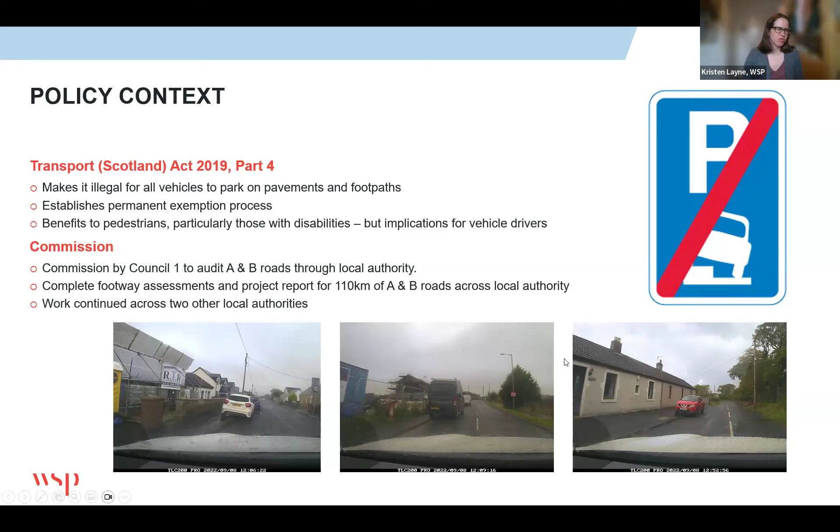So we narrowed it down to 110 kilometers of A and B roads across the local authority. I'll show you what that looked like in practice, and then how we applied that into other local authorities. The pilot project for this first local authority took place in 2022, and that was the first piece of work we did in this space.

The legislation had been passed 3 years prior, but everyone had other things on their mind in 2020 and 2021, as you can appreciate. By 2022, we realized, oh goodness, they're going to start enforcing this legislation. How do we actually do this, and how do we address the implications of this?

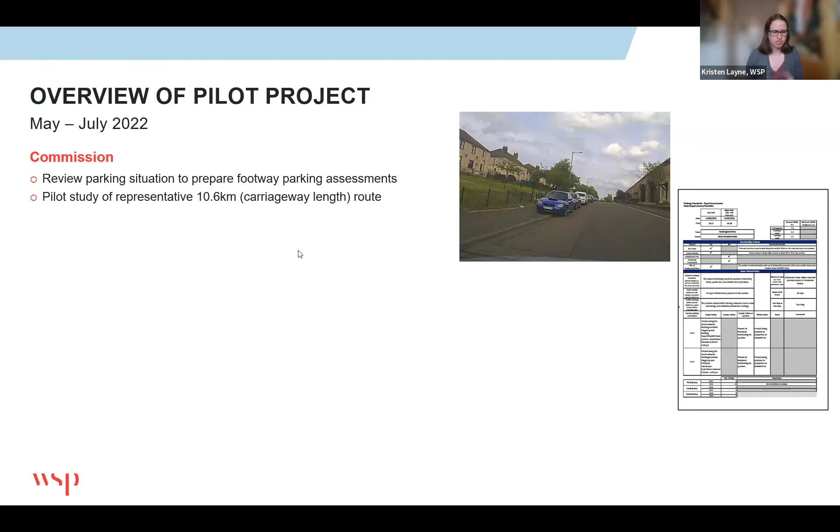So we started with a pilot study, a representative 10.6 kilometers of route - that's the carriageway length. Of course, the second you get footways involved, there's more, because all of the roads we were looking at had at least footway on one side, if not 2 sides. And we went from there.

First we did a desk-based study and identified road characteristics and functionality, and boy, was Google Street View a lifesaver here. It's not perfect, it's got its problems, but it made it really useful to have a look and familiarize ourselves before we actually went out.

This wasn't a particularly active travel-based methodology due to time constraints, although we did use electric vehicles so that we weren't putting additional pollutants into the air, if that's worth something. We did a daytime and evening site visit, driving each route twice, so we were able to record both sides of the road and capture in real life what was happening on a typical weeknight and weekday.

We did it once at night and once during the day, because some people are away during the day but then park their cars in the evening, so we wanted to see what was happening there.

We took that dash cam footage we collected, compared it with the OS mapping, and recorded 2 major things: the parking behavior - how many wheels were on the footway, if any - and the available carriageway and footway width. You'll see why that's relevant momentarily. Then we analyzed what we saw and recommended routes forward.

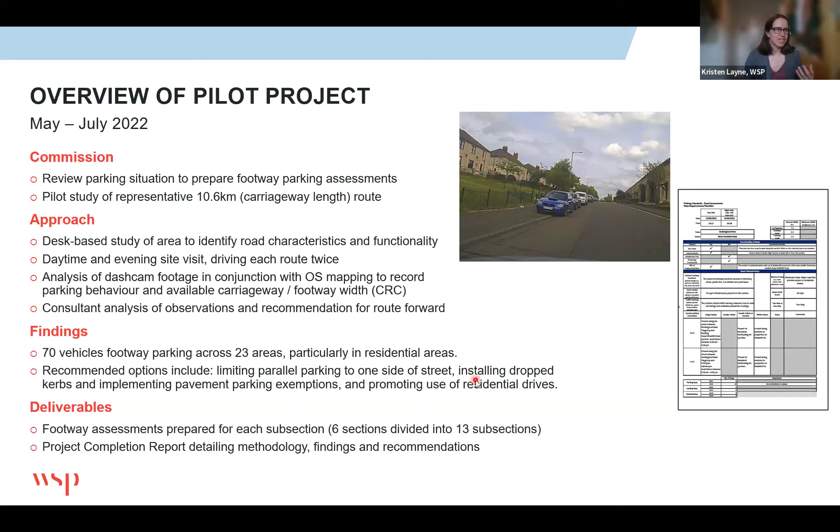So that was our first initial pilot project. I'm conscious that took quite a while to talk through, but it gives you an overview of what our approach looked like. We then took that and rolled it out to the full 110 kilometers across the local authority area.

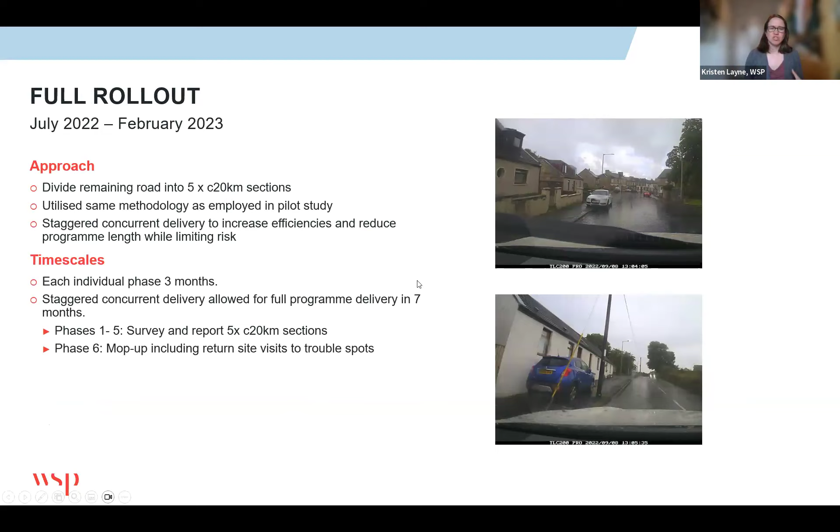So for those of you keeping track at home, roughly speaking there were about 100 kilometers left. We divided that into 5 sections, utilized the same methodology of recording the route, and made sure we did that again on representative days, doing it in the early autumn.

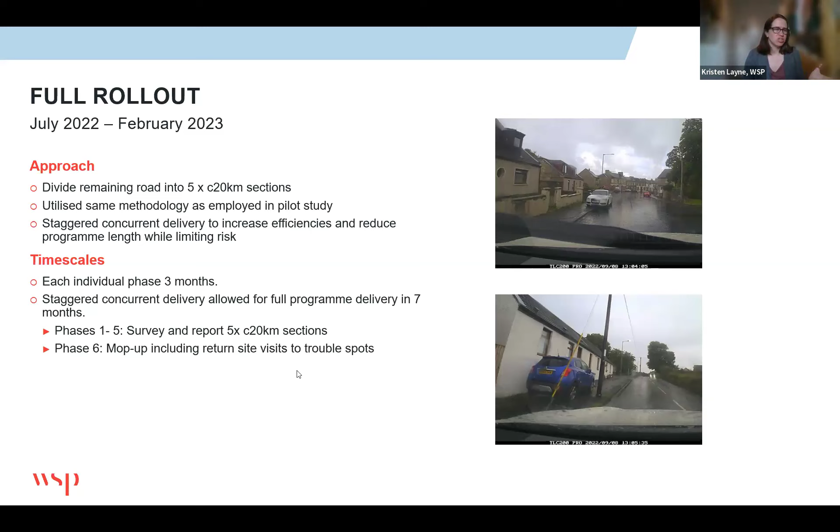There's a little bit here about timescales that I won't bore you with, except for the fact that we did the full program in about 7 months. Obviously this wasn't a full-time thing, but it took about that long to analyze, to review, and to make recommendations.

So the overall recommendations for that first local authority were that we found 307 instances of footway parking. In most of them, we recommended maintaining the status quo - not the status quo of footway parking, but the status quo of the road structure. We said, go ahead, enforce the legislation.

There's either enough space on the carriageway for people to parallel park and it'll be fine, or there's enough space in the surrounding road network to absorb those vehicles. So that's fine. Like I said earlier, we encourage the use of residential drives. There were a lot of unused residential drives, and we won't even get into unused garages on this call - that's a whole other ball game.

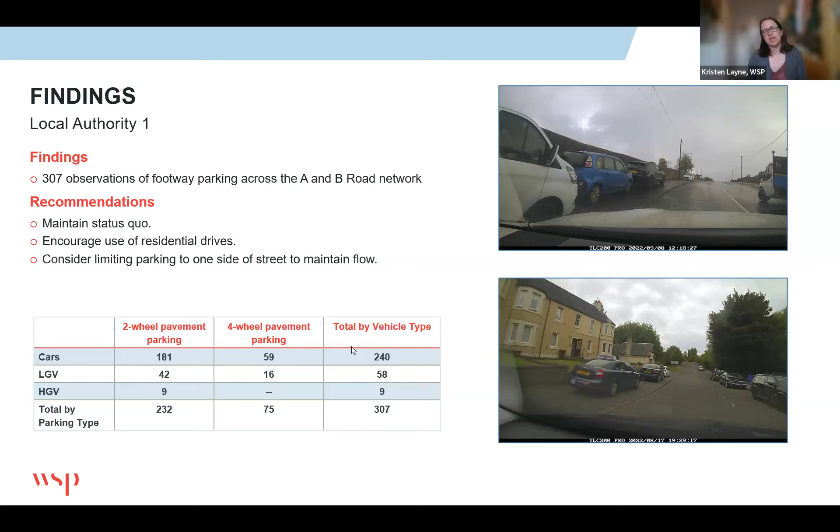We considered limiting parking to one side of the street to maintain flow. That was particularly in cases where the carriageway width wasn't sufficient to withstand parking on both sides of the street, unless it was footway parking. So we said, okay, let's formalize it to just one side, and that will allow you to maintain your flows.

And then in 9 instances out of all of these locations, we said this is somewhere where we would recommend you consider widening the footway, installing that dropped kerb, delineating a parking bay, posting the appropriate signage, and applying for exemption from the Scottish government.

And so I think that gives you the scale of when we did an audit like this - actually the number of places where we said this really does need to be exempted, or we think that it does, were very, very low. In most cases, the footway should be left to the pedestrian. So that's what we did in one local authority.

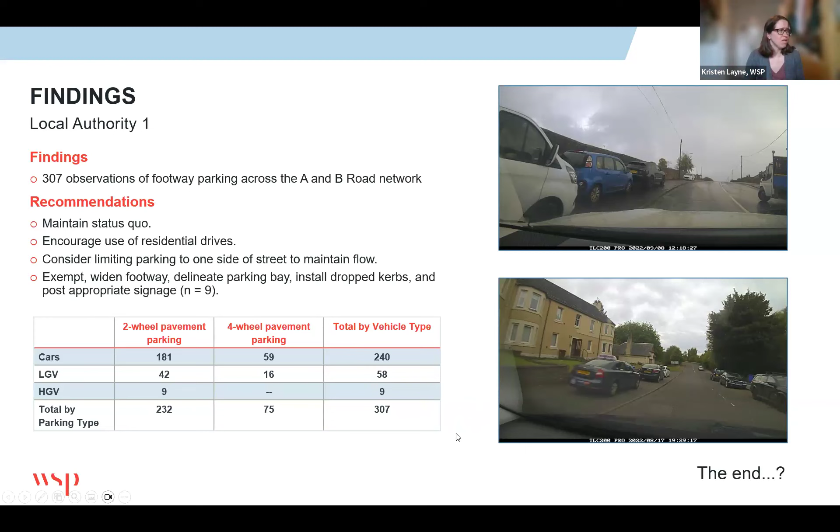Then we came to another local authority who said, hey, we heard what you did in that first one. And they said, can we do it for us? And we said, well, yeah, of course we can do it for you. And they said, great, here's a street view inventory of 12,500 streets in our local authority. Can you just do that then?

And we had a look at the inventory, and we realized that about half, just over half of those streets didn't have the information that we would actually need, because what we required was to actually see whether vehicles were parking on the street.

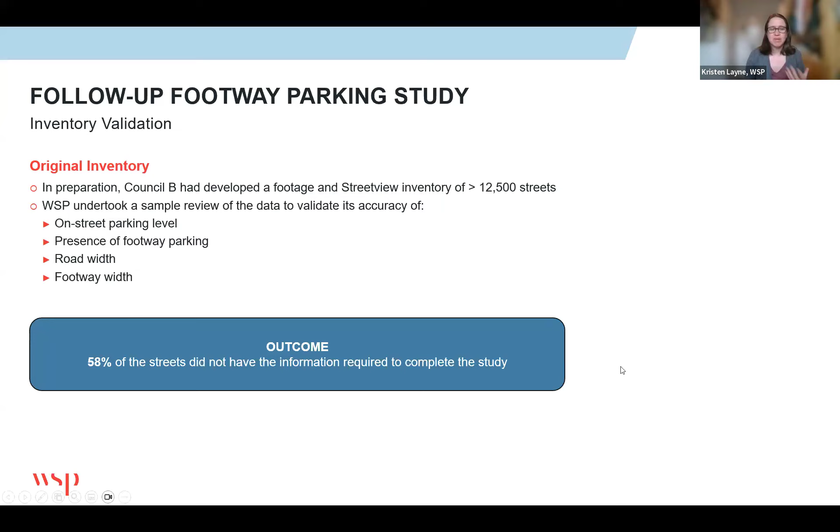We needed to see how wide the road was and how wide the footway was, and we couldn't tell that from the inventory that they had. So this is a different approach that we took.

Basically, instead of driving all of the A roads and B roads across a larger local authority area, we actually did some desktop-based prioritization. There were two elements that we considered as we looked at this prioritization process.

We considered whether or not a route might be eligible for exemption from footway parking. To be eligible for exemption, the carriageway needed to be less than 5 meters wide, so that we knew there was going to be potentially problems with vehicles fitting down the carriageway if there was parking there, and it needed to have a large footway that could be allocated for footway parking space. So that was the exemption route.

That was for roads that didn't have a footway that was sufficiently large, but the carriageway was also larger. So that was where we began to consider other options - are we expecting to see footway parking here already? Are we expecting to see more? And is the displacement likely to have a significant effect?

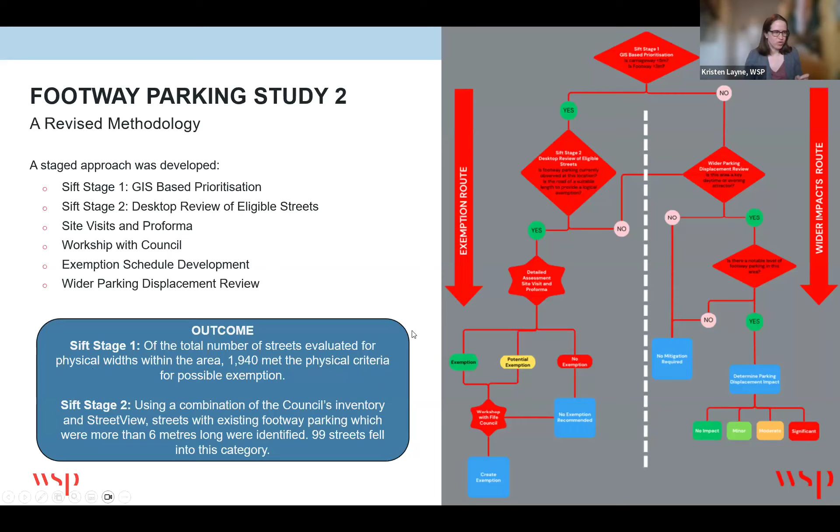We only looked at streets that were more than 6 meters long - there were some that were arguably more of a drive. And we identified 99 streets that we wanted to review at that point. That's a much more reasonable way to go.

We divided those into 15 zones, and I filled out the same proforma that we had for the first local authority. So we detailed the road characteristics, the functionality, whether vehicles were 2-wheel, 4-wheel, 3-wheel footway parking, and again the expected impact of legislation in terms of anticipated displacement.

So of those 99 streets, 48 we recommended no exemption, 40 we said exemption, and 11 for potential exemption. This was a higher rate of the ones we are actually studying, but of course we boiled down the ones we were actually reviewing to a much smaller number of the whole.

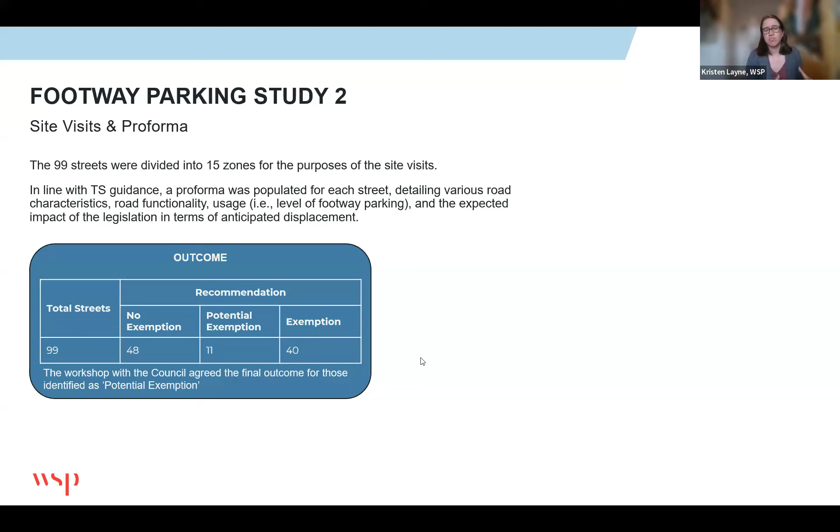So that was very interesting. This is just a bit of information about how we calculated displacement, the potential impact for displacement parking, which is really interesting. That was based on places that were specific attractors, so not necessarily residential areas, but things attracting users in other ways. So we wanted to make sure we were capturing that - that was kind of a different element to the work.

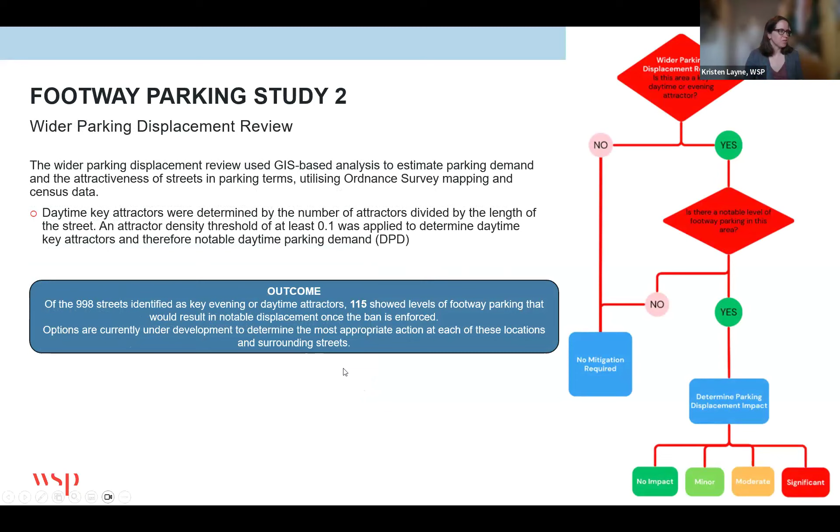And then I'm going to tell you about our third study, which is a more shorthand approach - you see I've got my little animation here - because this was a much lower budget project. The local authority didn't have a lot of information, a lot of time, a lot of budget.

But what they did have was really good data from the bin lorries. And what was really neat about this is that at the end of the day, they thought, well, actually what we're interested in is where the bin lorries would have an issue getting through a road if people move from parking on a footway to parking on the carriageway.

So there were about 40 streets that the council selected for us to survey based on the feedback from those bin lorry operators, where they said they think they might have a problem if vehicles quit parking on the footway. Those streets were then broken into 3 zones for the site visits, and we produced the proformas based on the same methodology we did previously.

And the outcome of this particular project was that we recommended exemption for none of them. We said, where there were issues noted, there is sufficient room for services, and there's sufficient room for people to use the carriageway and for the footway to be given over to pedestrians. I just mentioned that one as an interesting approach, really different from the flow chart I showed you on the previous slides, but I thought it was a great use of data in a lower budget situation.

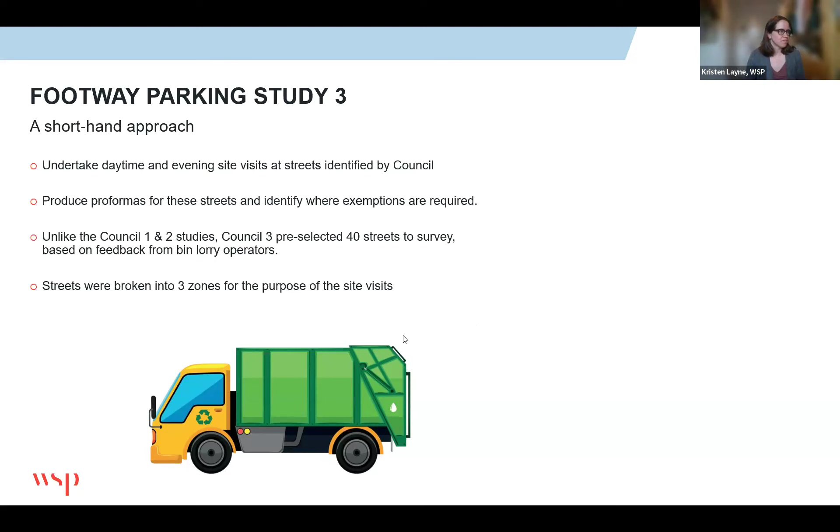So those are the 3 scenarios I wanted to talk to you about, and I'm sure we'll move into some interesting discussion now. I think the key takeaway from up here in Scotland is that councils have all interpreted the guidance differently in terms of how to enforce it, and they have different thresholds for how they want to apply for exemption to this legislation.

We also know this is not a panacea. It's not going to fix pedestrian issues across Scotland. One of the easiest roads for us to rule out for consideration in our study were the roads that didn't have footways - you can't footway park if there's no footway. But actually, that really highlights issues of connectivity for pedestrians, and that's a topic for this group and many other groups for another day.

A couple more specific lessons learned for us: confirm the date of the street view footage you use if you're doing a project like this. I'll spare you some of our lessons learned, but I'll put it this way - if you come to a council with a recommendation based on street view footage, make sure there's not a new residential development that's gone up since the footage was taken. It can change things a lot, and there's no perfect substitute for actually getting out and seeing the site live.

And finally, the reason I put 3 different projects in one presentation today was just to build a bit on methodology from previous projects. We started out with the local authority asking really open questions well ahead of the curve, trying to understand the impacts post-COVID of this new legislation. We were able to use that in a few different local authority contexts, and hopefully it's something that can be useful to you in your relative areas as well.

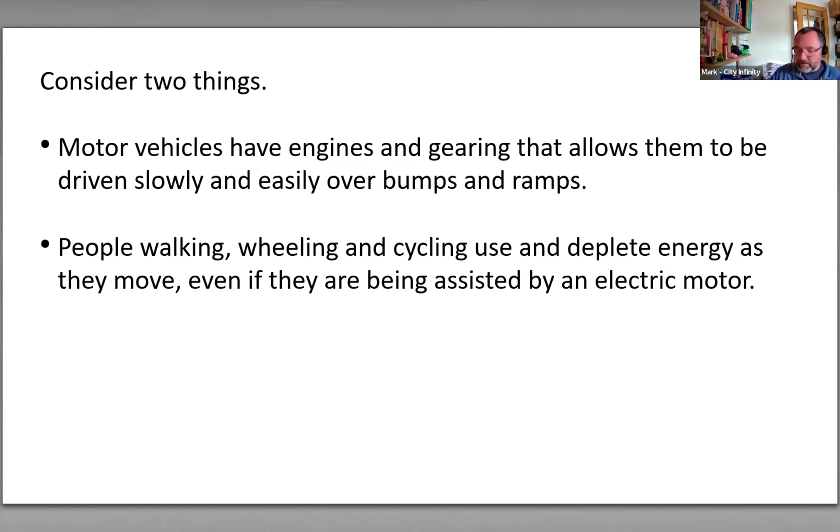So two things to consider tonight. I think people tend to forget that motor vehicles have engines, they've got gears, you can drive them over stuff - as we've said, people are bumping up onto the footway here, it's quite easy, not a problem. However, those walking, wheeling and cycling have energy and they deplete it as they move. Even if you've been assisted by an electric motor, fully assisted even, it still takes energy to move around, as we'll find out in just a second with this particular subject.

So let's go and have a look at a bit of guidance here. This is guidance that has been around for a long time, updated a couple of years back. I'll give you the reference in just a second.

So we need a bit of a crossfall for drainage. But if it's too steep, we get these undulating footway environments - difficult for wheelchair users and other people with mobility or balance impairments.

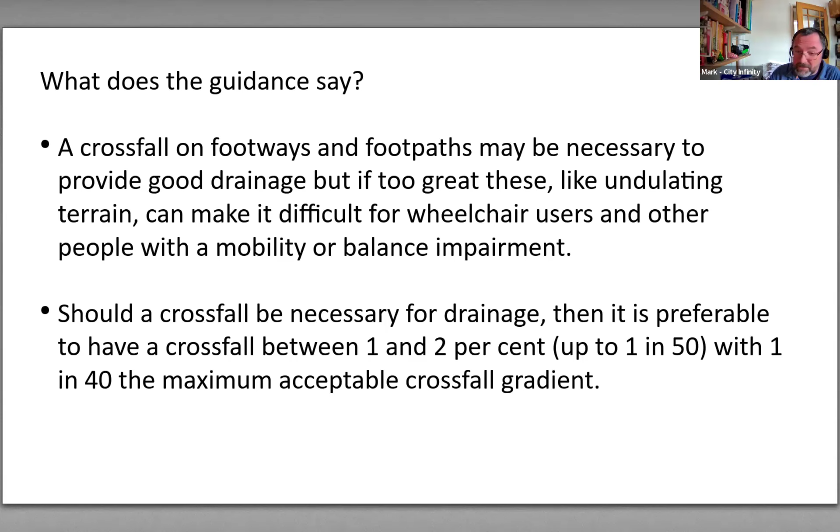For drainage, we're looking at maybe 1 in 50, with 1 in 40 being the maximum slope. I'll say 1 in 50 to local authority people and contractors - they'll be horrified because that takes an awful lot of skill to lay. If you're doing it in asphalt, you probably want to get a machine in to do that. But here we go, this is what the guidance is saying.

And then these crazy variable crossfalls are a big problem for wheelchair users. If you're using a mobility scooter, it's going to be tipping you over a lot as you go along. The bold on that final point there is my emphasis.

So local authorities or highway authorities, they're the ones putting the vehicle crossovers in. They should really be having a policy in place on how they're going to arrange front garden parking and off-street parking, call it what you want. And they need to take into account these whole issues of gradients and levels and everything else.

This is not what I'm saying - this is what the Department for Transport is saying in Inclusive Mobility. 2021 was the last revision. This basic stuff has been around for a very, very long time in the previous iterations.

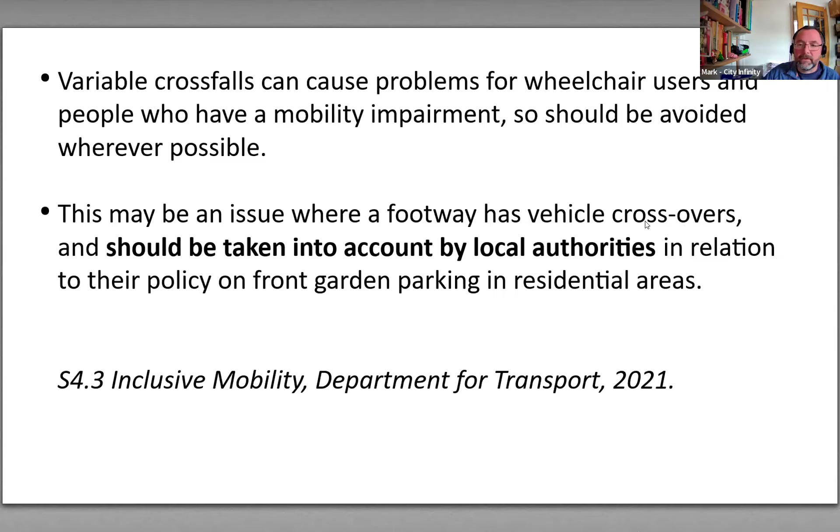So let's look at some of the practical stuff because that's more interesting than the guidance. So what I have here is kind of going back to that first slide, the red area, the steepest area here. I've got a fairly standard, straightforward example of what we often see at driveways - a little bit of a curb upstand there, 30 millimeters.

This is all in meters for ease of calculation. We've got about 100 millimeters difference between the back of the footway here down to that drop curb, and that's giving you a 1 in 18 crossfall, or 5.6% for those that like percentages, based on a standard 1.8 meter wide footway or thereabouts. This is what we're talking about - 1 in 18, maybe 1 in 20. The guidance is telling us we should be doing 1 in 40, 1 in 50 crossfalls, so this is a hell of a lot steeper.

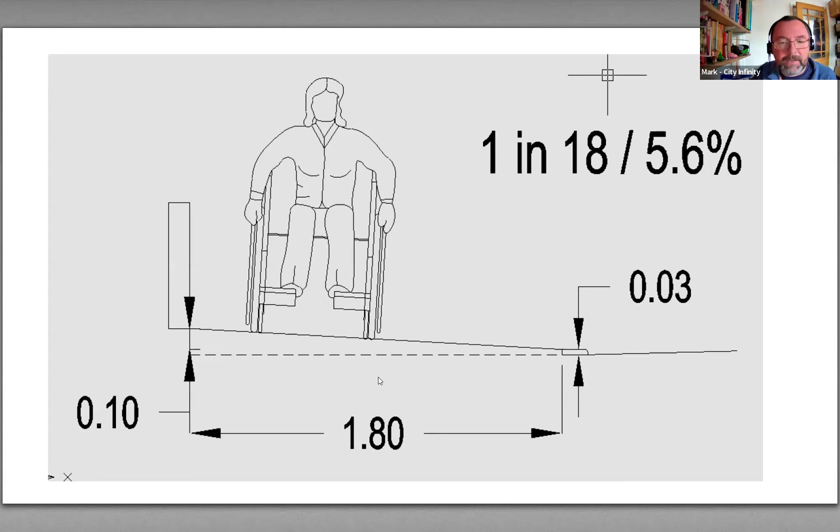This is what it looks like on plan from the very old sketch I did, but potentially you're going along at 1 in 50, all of a sudden you've been tipped over at 1 in 18, then you're going back up again. So it's tiring, it's awkward, it's unpleasant to move along.

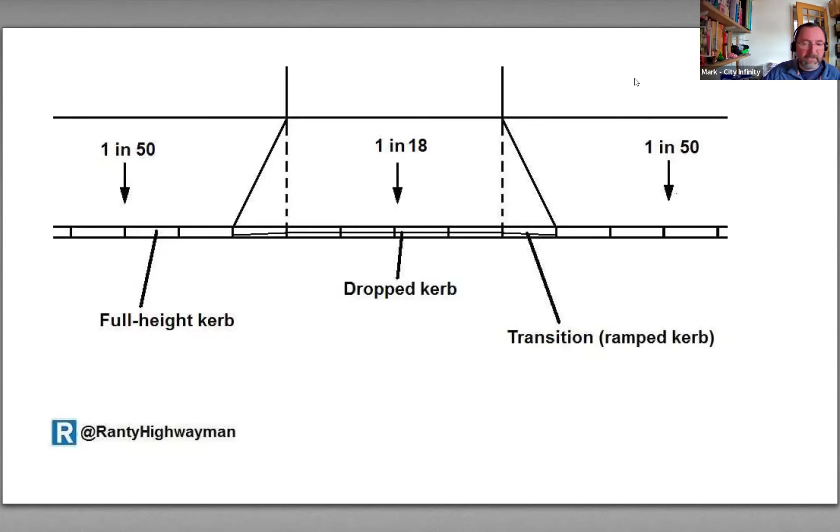If we look at how that affects the force on somebody - if you're on a flat surface, the force of gravity is acting downwards. As soon as you tip somebody up, the force of gravity also acts to pull you across. So from a wheelchair user's point of view, as you're wheeling down a really steep gradient, gravity tends to be pulling you to the lowest point towards the road. So as you're going along, you have to counteract that, and that can be quite tiring.

That is as far as I'm going to go with the physics. You can go and work all this stuff out if you really, really want to. The fact is, you're being pulled towards the road - that's tiring.

So if we actually follow the guidance in Inclusive Mobility, maybe what we can do in this 1.8 meter wide footway is keep the back meter flat and ramp the front down, because we're talking about cars - they've got engines, they've got gears, they can cope with this. This is much, much more comfortable for people to traverse.

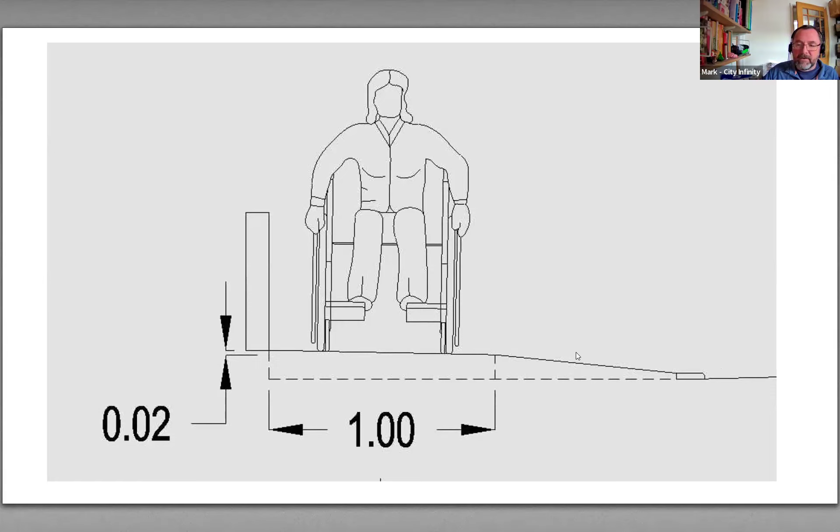If we go back to the previous presentation, talking about maybe 1.5 meters kept clear of parked vehicles, the further across we go with this nice flat area, the steeper the front becomes, which is fine - cars can get over it. This is in plan: we're keeping the back part of the footway nice and flat, that 1 in 50, and we're making the front steep because vehicles can go up steep ramps.

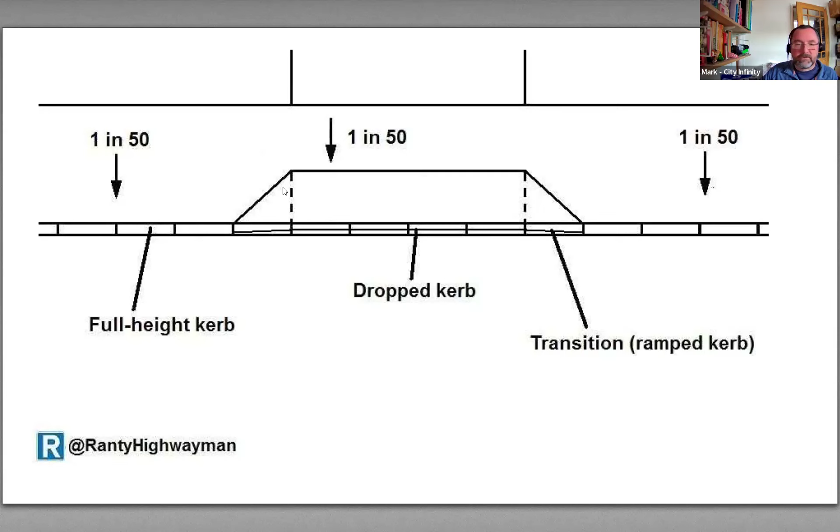One way of doing it. Again, just another contrasting view of what it might look like. So the traditional approach, in inverted commas, where so many people are doing it, this horrible slope, compared with the front here, the grey area is the slopey bit, the pink area can be used.

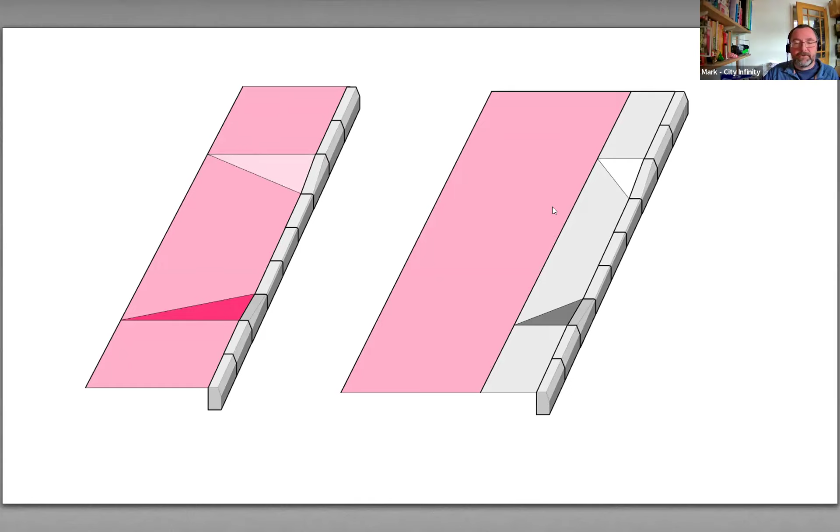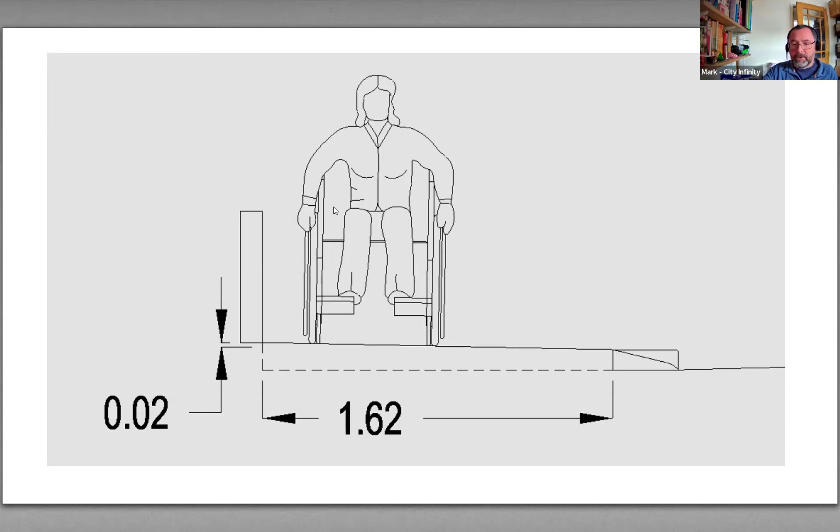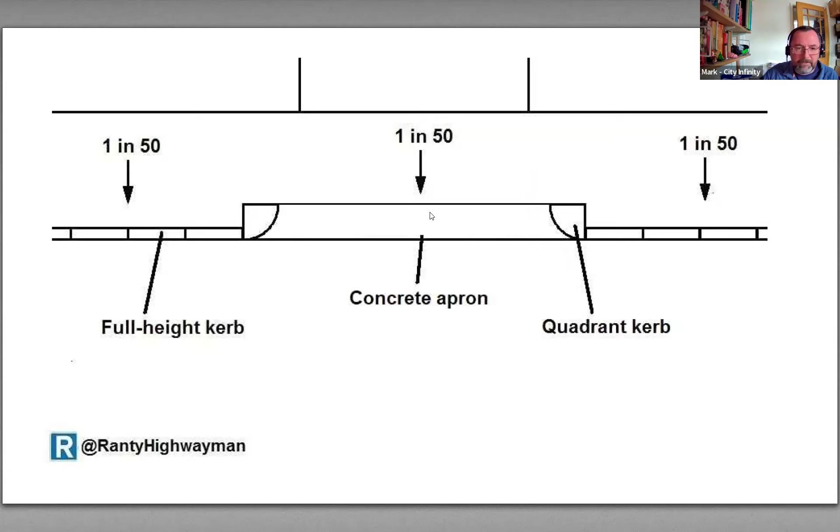In plan, here's some really old traditional kerb units, quadrants or cheeses as some might call them, big lumps of concrete kerb. And then the old-fashioned way of doing it would be to put a pair of those in as shown, and then just ramp the front up out of concrete. You can go back to the 1930s, they were everywhere. This is what we used to do. Over 25 years ago, when I was a maintenance engineer, that's what I did. We've kind of lost the art of keeping things nice and flat.

And here's what they look like. So it's really only the bit at the front that we're sloping off.

So this stuff is not difficult. It's basic, it's easy to do. Why aren't highway authorities doing it everywhere as routine?

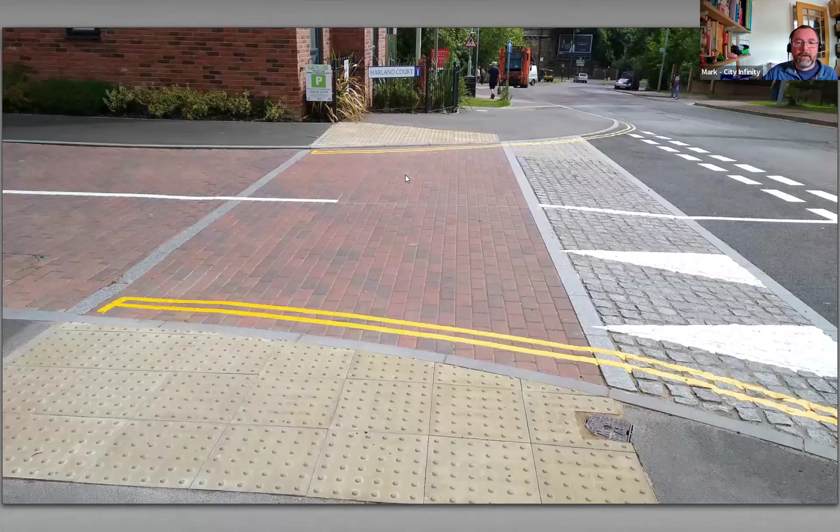Fantastic, we can go beyond this. And let's look at some old friends here. So here's a raised table, speed hump in a side road, call it what you like. We've kept the footway through here nice and level in terms of gradients, and we're sloping the front off.

So we can do this for junctions and side streets. Why can't we do this for driveways in residential areas or whatever?

Literally the cars, it's not the driver making the effort, it's the cars making the effort. And people walking, wheeling, and cycling get the nice flat space.

So anybody from a highways department watching tonight, you're challenged to go back and look at your policies and to go and speak to whoever looks after maintenance and put in crossovers. Why on earth aren't we making the back part of it flat and just sloping the front off? There you go, it's a pet peeve of mine.